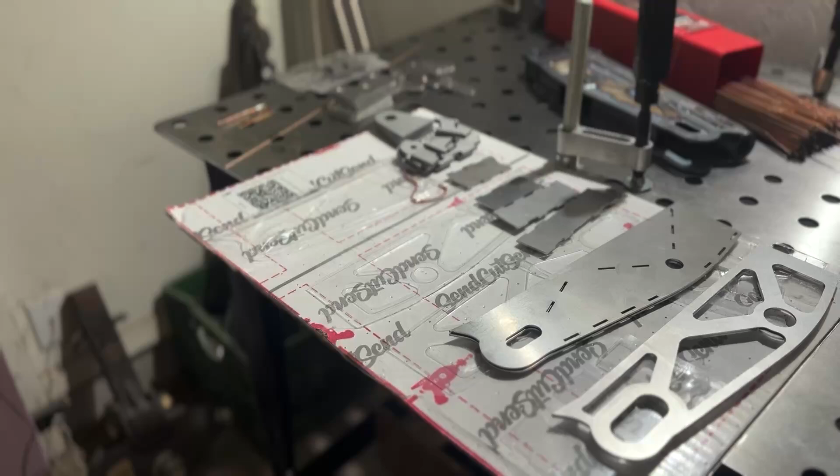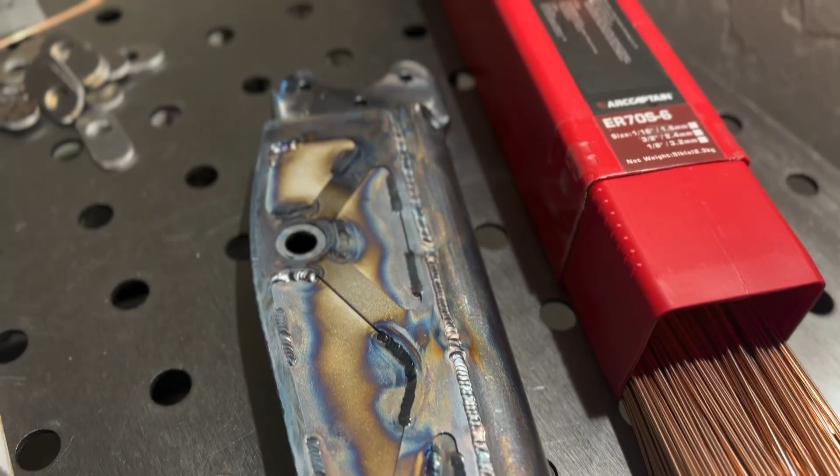Here we have our final rendering of the control arm for the Scirocco.

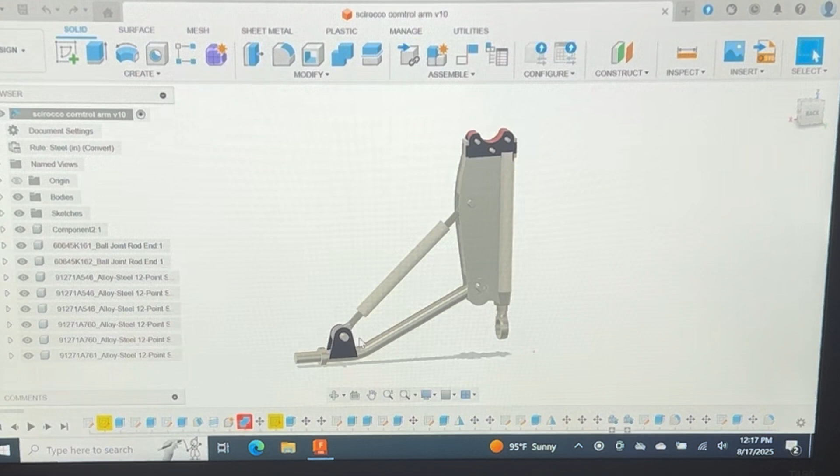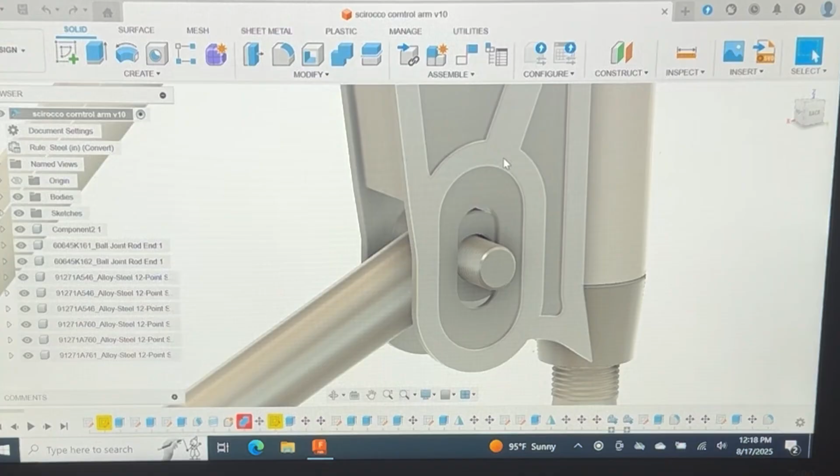We will gain all of our camber adjustment from the inner front ball joint that will push the outer out, because that moves this whole arm, and this pivot point down here needs to stay parallel with the car. We have designed...

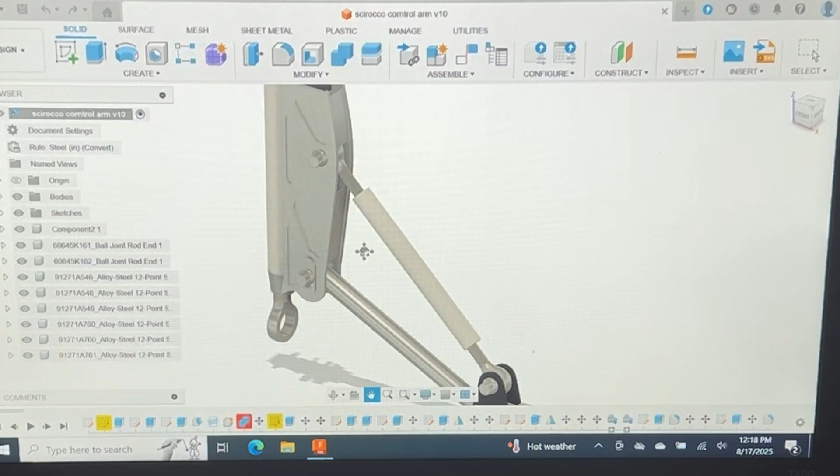Basically a camber shim to fit within the lattice structure between, so then it secures this arm at that location. The other adjustment we have is a true caster adjustment, which is this arm. It will push the arm forward or back, caster. It's more in depth. And then at the very ball joint, we have...

Two roll center shims. So with it currently positioned central, that would be a 0 roll center. You can adjust the shims, put both on top, both on bottom. It gives you a quarter inch both directions. Not a massive amount, but if you can build in a little extra tunability into an arm, why not do it?

So that is the main arm. Let's see if we can't break this down.

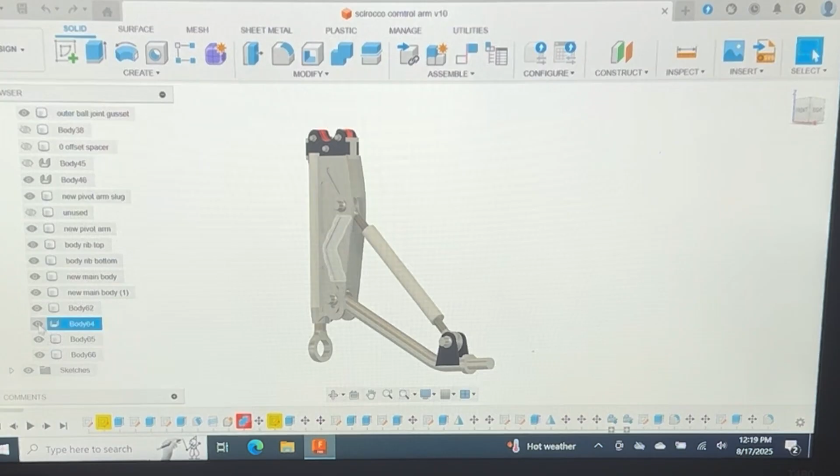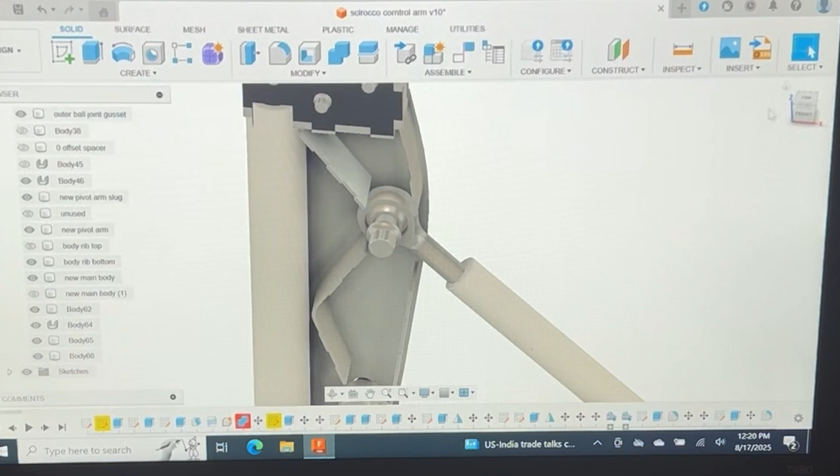So here you can see inside the arm, we have ribbing that is tongue and grooved into the main base plates, that then weld to this tube and to the outer ball joint. You can see all the tongue and groove spots where the ribbing will bolt into it.

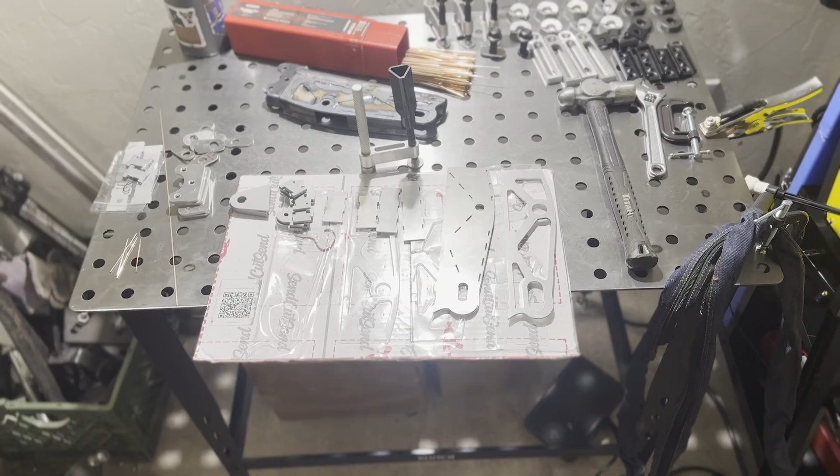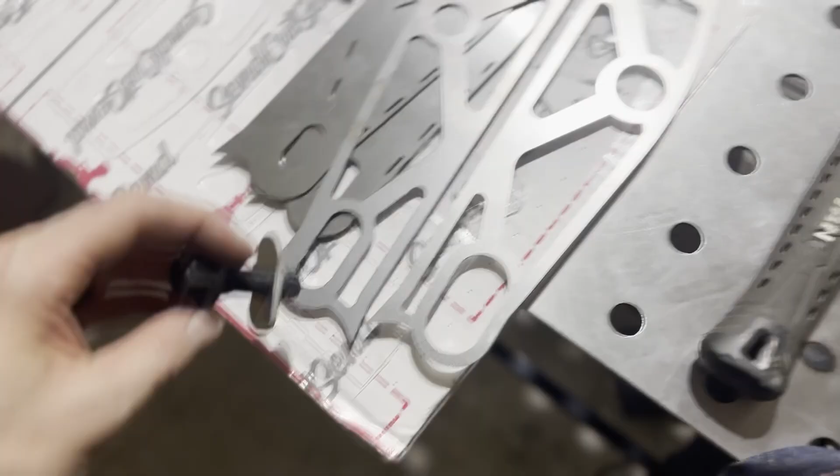So you've seen the CAD file, and now this is coming to life. We have our main body pieces. We have our exterior skeleton pieces, which these slugs fit right in. Here's all the different slugs, different heights, so then you can change where it sits.

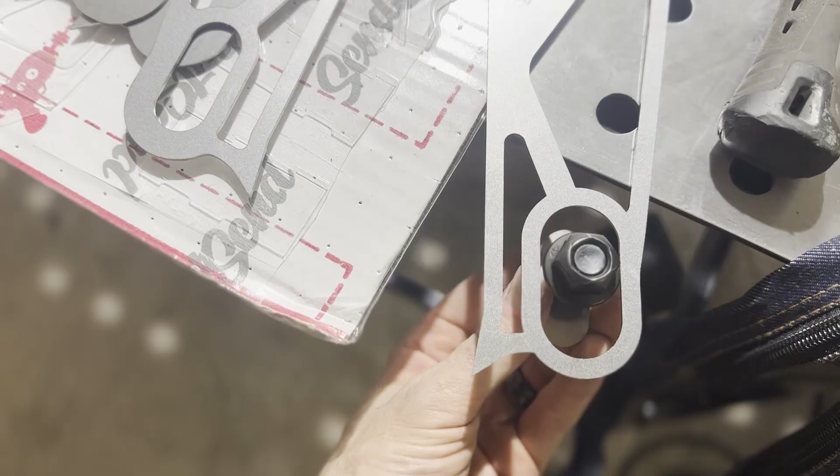And then on the back side of this is the flange of the nut, it just fits in there and then slides up and down. Flange of the nut fits right in there as well.

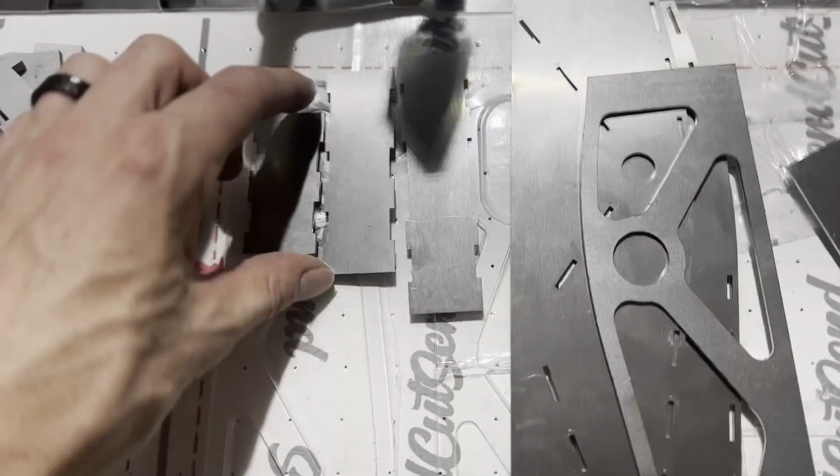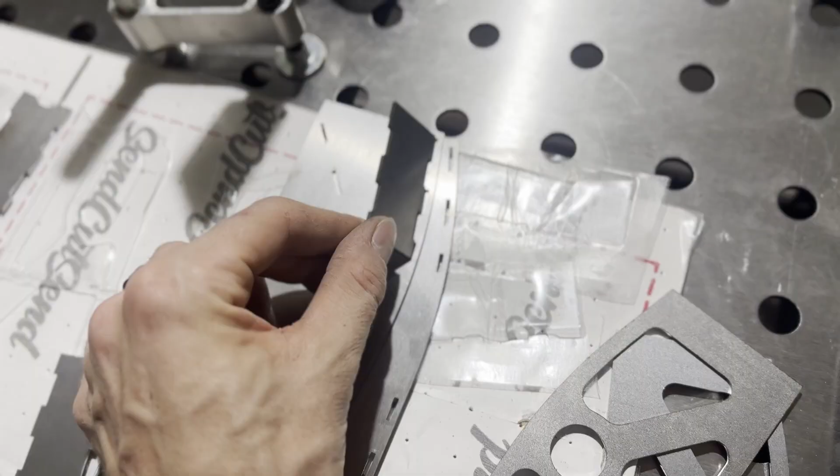Here you see some of our interior ribbing. So this piece will get bent and snap into there. This piece here, this piece will kind of get a little roll and fit in there. And then I'll have to notch that just a little bit more, and that fits in there and then gets welded up here in the tube.

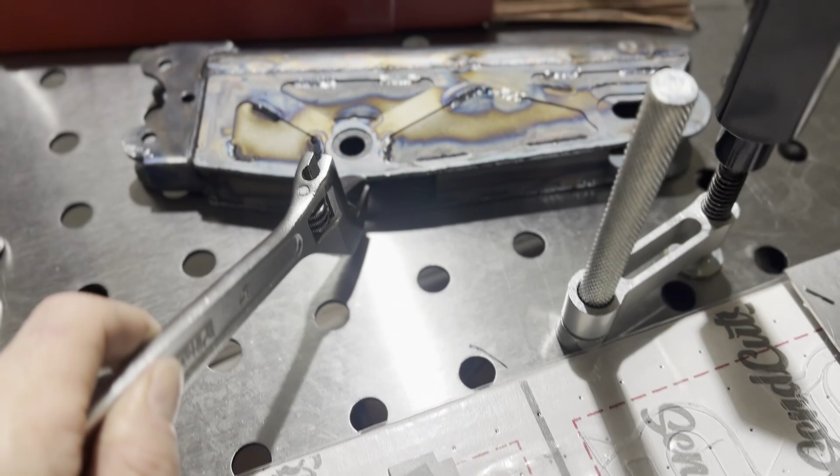I didn't film this one as I just wanted to get the welder dialed in and everything else, but you can see the interior ribbing. So this should be mighty strong.

Let's get all these pieces cleaned up, DA'd, and tacked together so we can start building the second control arm.

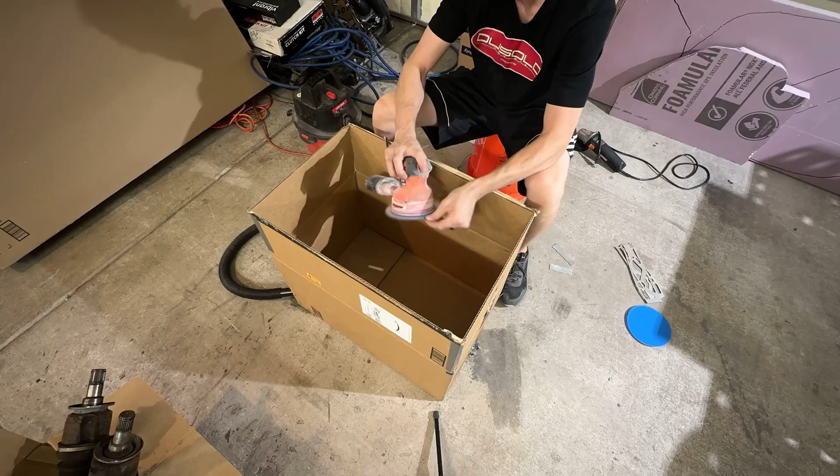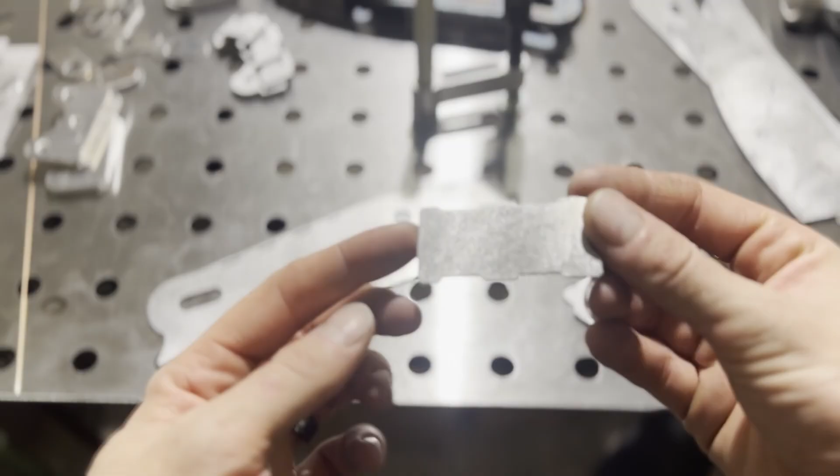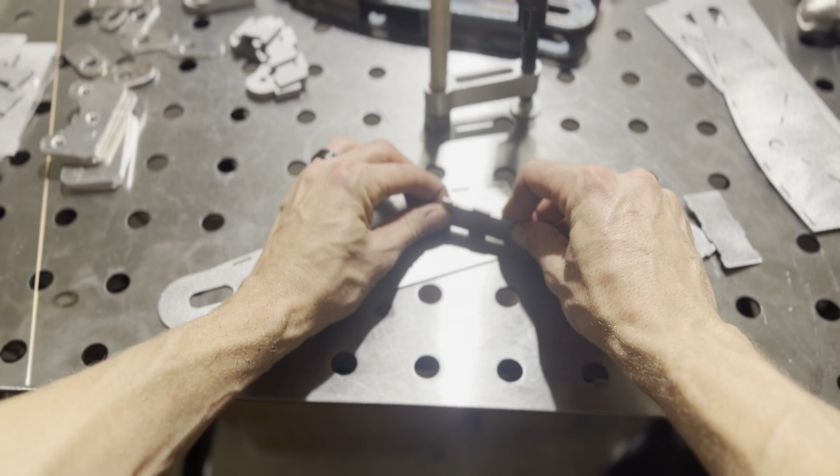So when I went through and cleaned up, I just put small little chamfers on all the corners. That allows it, so when you go to put it into the actual body, the sharp corners don't catch the edges and it allows it to go in nicely.

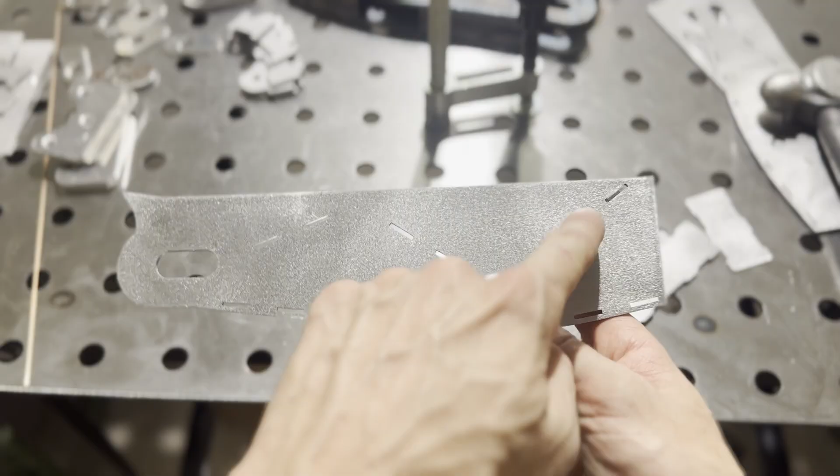So now I just need to fit all the other braces on both sides and then start doing all the plug welds on the top side. Go through, clean all those off, and then like the piece back here, I can start welding the, I'll call it an exoskeleton, together. I also have...

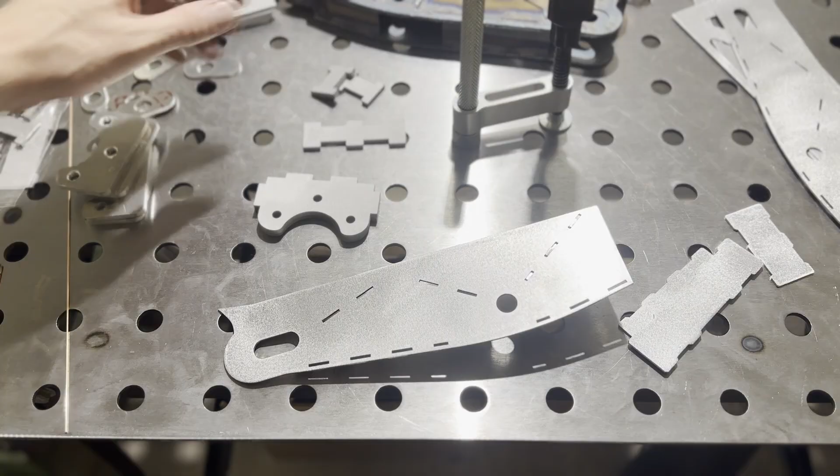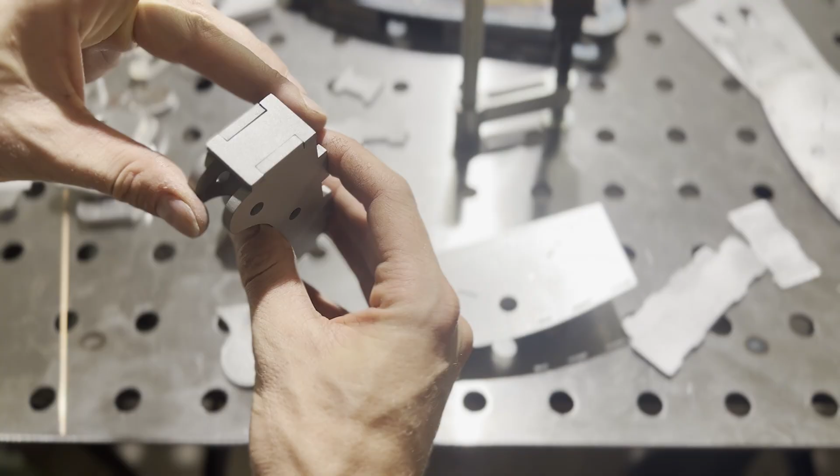Let's see here. The outer ball joint is its own separate piece. So that's where these two will come in. We've got our side pieces that'll fit nicely. The bottom, so on and so forth.

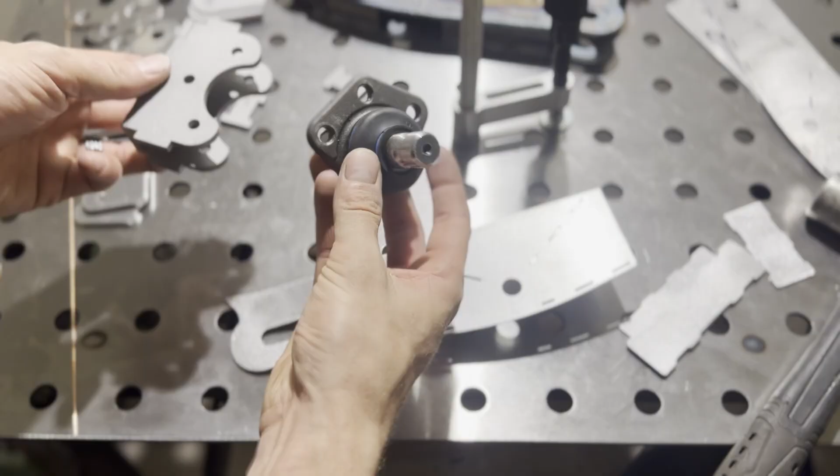So we have our separate ball joint, we have our outer piece. As you can see, there is a gap. So what we came up with were two shims that fit either side. It can be top, bottom, or in the middle. So that will adjust your outer roll center within this. So I thought that was a pretty neat design.

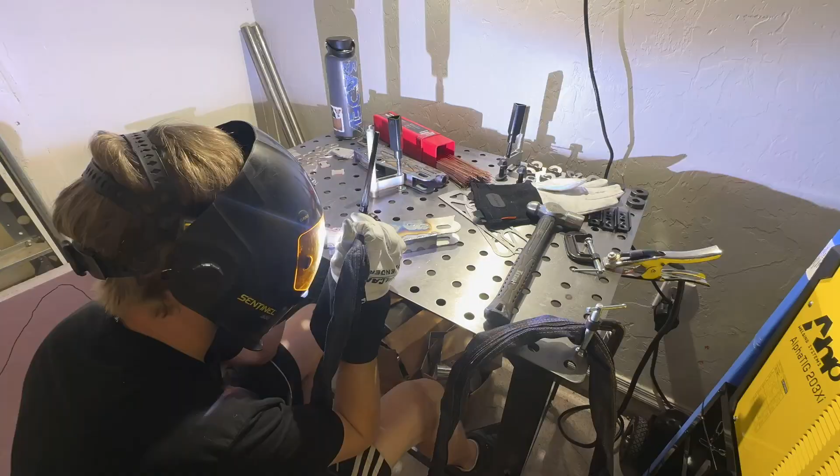You can see here on the welded arm that the lattice perfectly fits around the shoulder of the bolt. Then the lower section again has the adjustment tab. On the underside, again the shoulder of the nut just fits inside. This should stop the hardware from walking.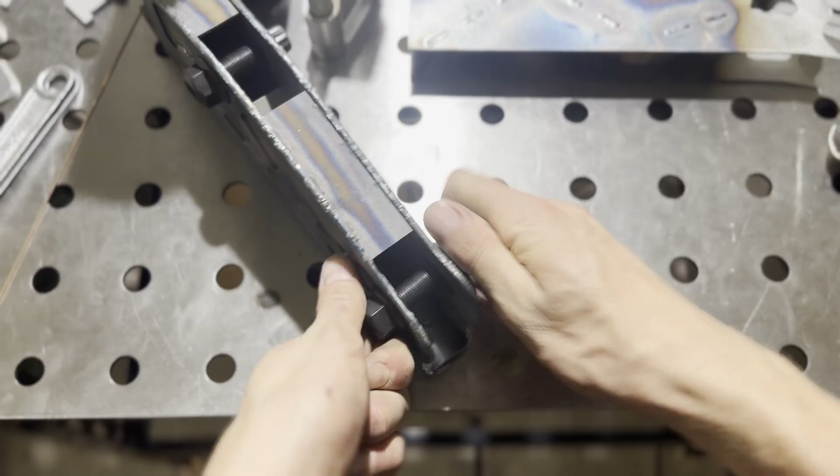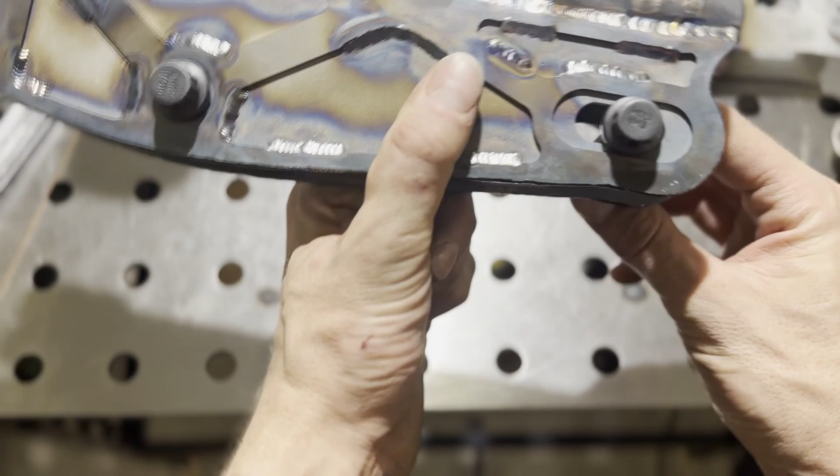And to show this, so as you adjust camber by lengthening or shortening the heim joint on this end, the rear arm needs to pivot so it stays parallel to the body. So you can see we have about 1 1/16 of play.

Here's our zero set. And this is our furthest down. So I think that came out pretty well.

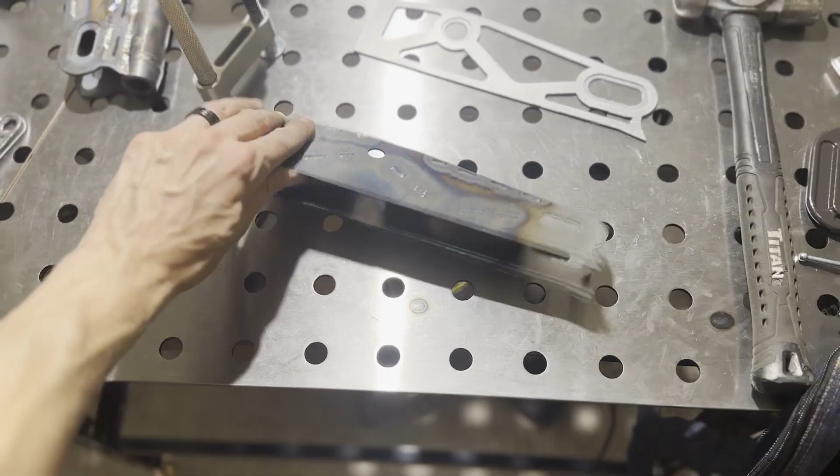So we've got both sides nicely plug welded. Good penetration all the way around. So now I'm going to sand this off.

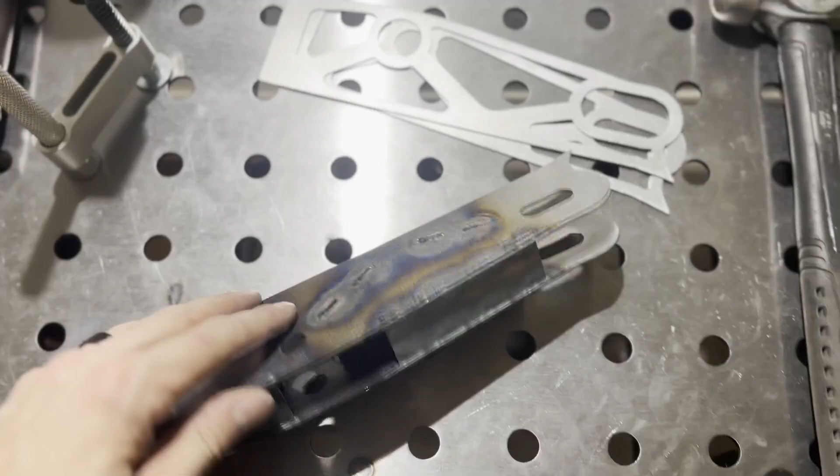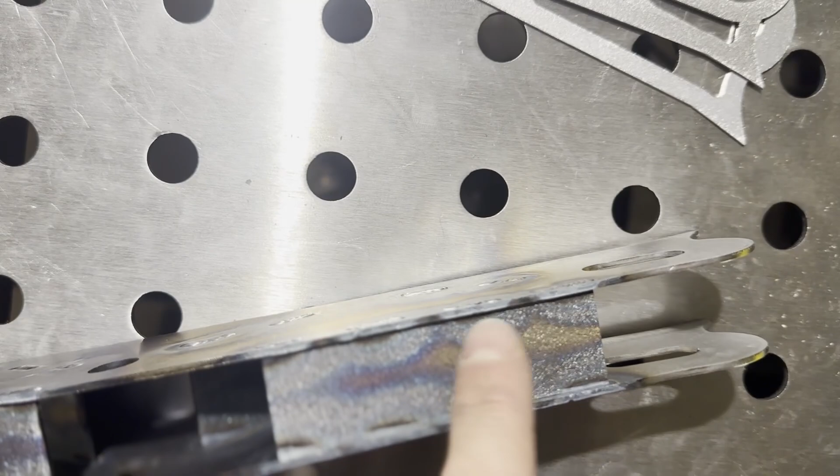I'm going to bring this back to work in the morning and sandblast all of the corners. Like on this, I welded that inside edge in between each slot just to help give it more support. So I'll get that sandblasted.

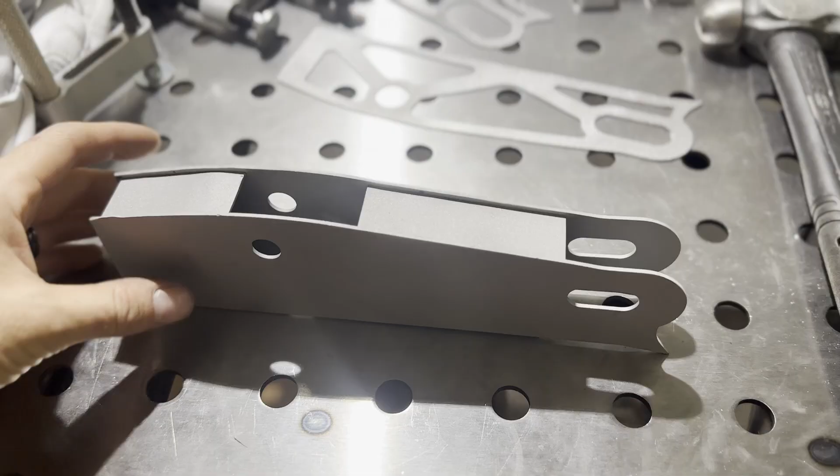And here's the part sandblasted. You can see the seams are nice and clean. It'll make welding very easy, it'll get rid of any kind of contaminants, and you'll get a better weld. So I'm going to wrap part 1 up right here, and we'll start part 2 tonight.